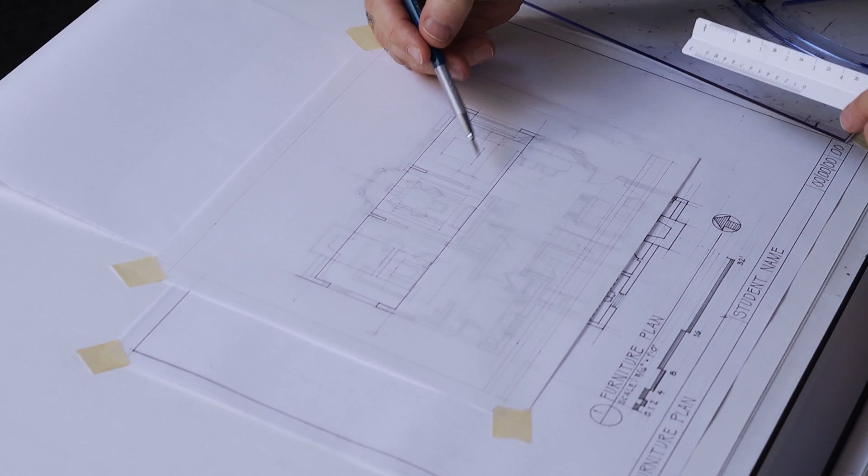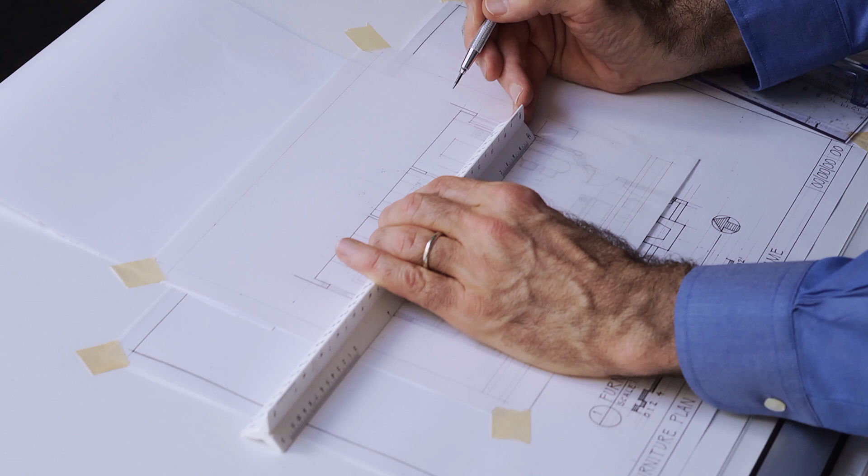So we're beginning to block in what we have in the elevation of the kitchen. You can always look at your kitchen handouts for sizes and heights, cabinetry. We've got our backsplash space, and we'll have the height of the cabinets. We know that they project out about a foot or so, foot 1, foot 2, something like that.

And then we know we want to have a little bit of a surround around the kitchen window, so I'll stop short by about 6 inches there, give it some frame, and there's a kick space.

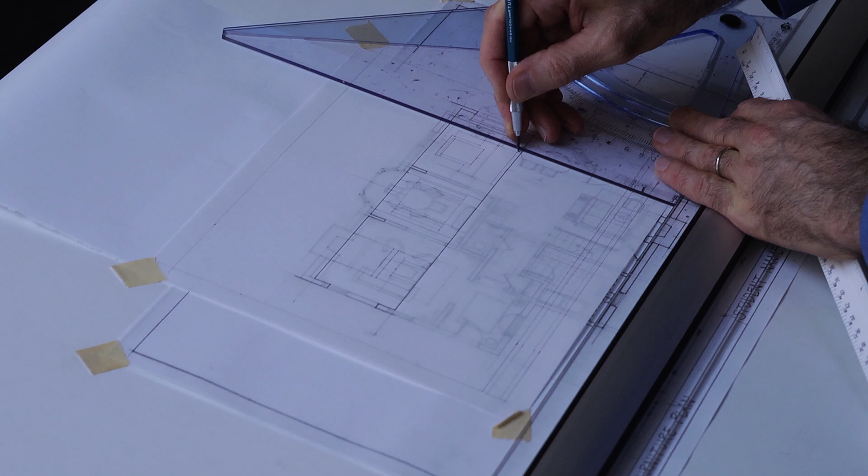Now when you're looking at the side, you can see a little bit heavier line because this is the side elevation that jumps out at you further, so bring that weight up just a bit, a little heavier, and then it gets lighter down there.

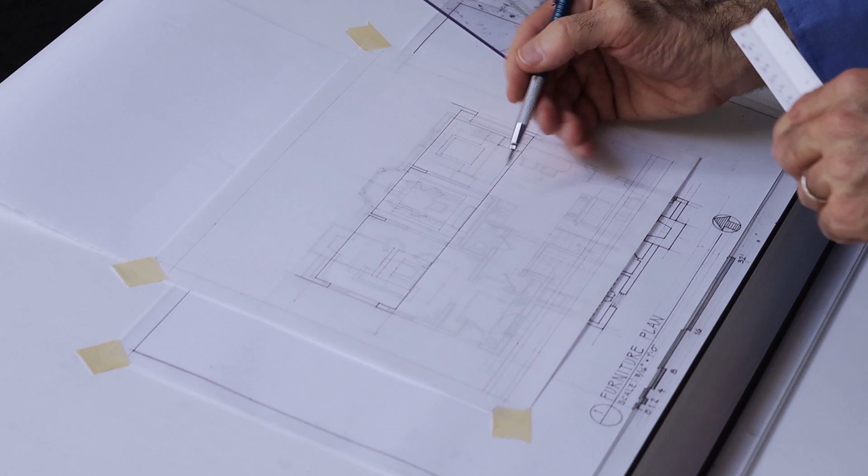And then up here is the refrigerator that you'll see standing up. Maybe there's a refrigerator panel over here, and that might go up to 6 feet, 6 feet 8, something like that. Panel height could be built in, so it could be higher.

I'll just give it some width and a little bit of projection for the face. Maybe shade it down to see what we've done.

We've got base cabinets, and we'll begin to show the divisions. We've got the refrigerator, we've got the upper cabinets, we've got the upper cabinets across the soffit above here.

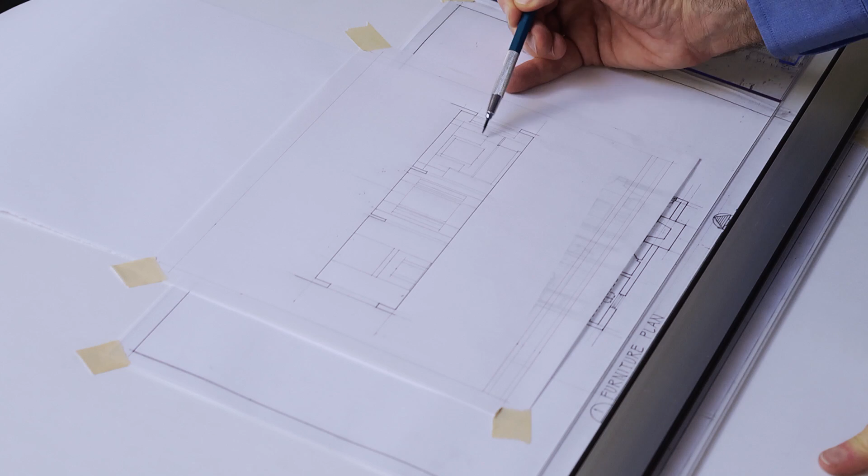We're going to have to show the hood for the range, and if you want to indicate the range there as a gas range, you could then, right above here, pick a height just to show that there's some burners up there, and that'll give you the sense of the range in elevation.

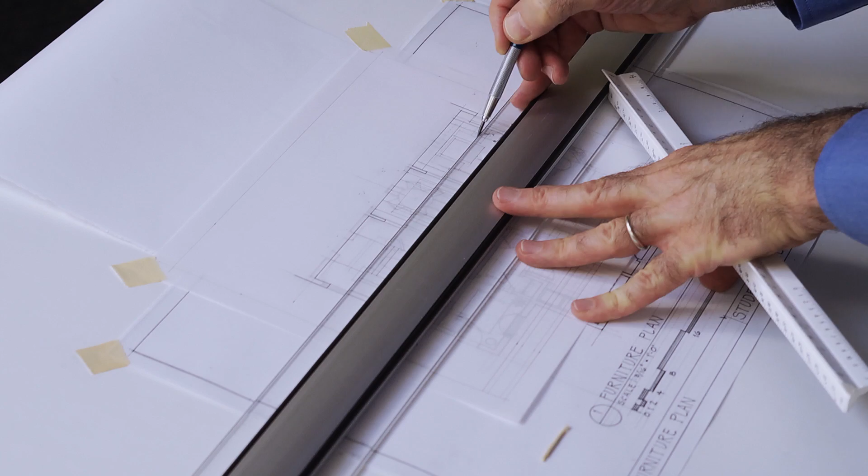So that'll project out. You see a little bit of line that projects out from the line of the cabinetry. You can see its little edge, and then it's going to have its angle going back. Maybe it's 45, maybe it's whatever. That's a design decision, but you can just etch it in the elevation here.

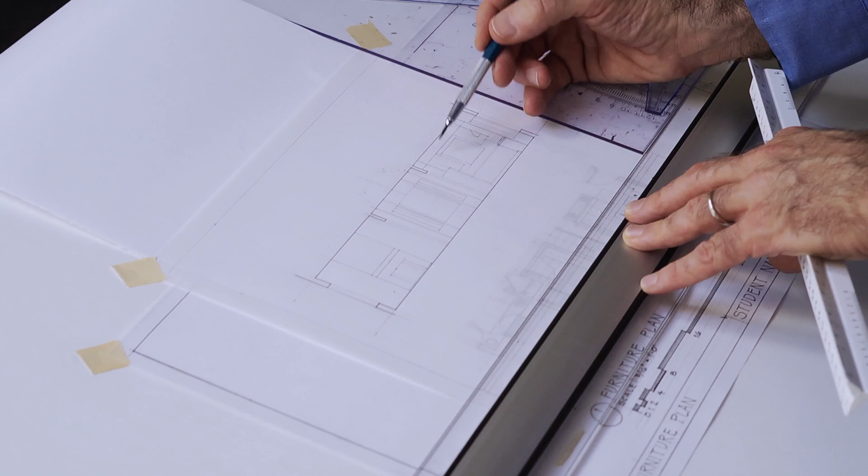And we look back at what we have: kitchen, range, hood. This will be the sink. There'll be cabinets here, refrigerator, upper cabinets, range. We've got the frame, so we could begin to flesh that out a little bit.

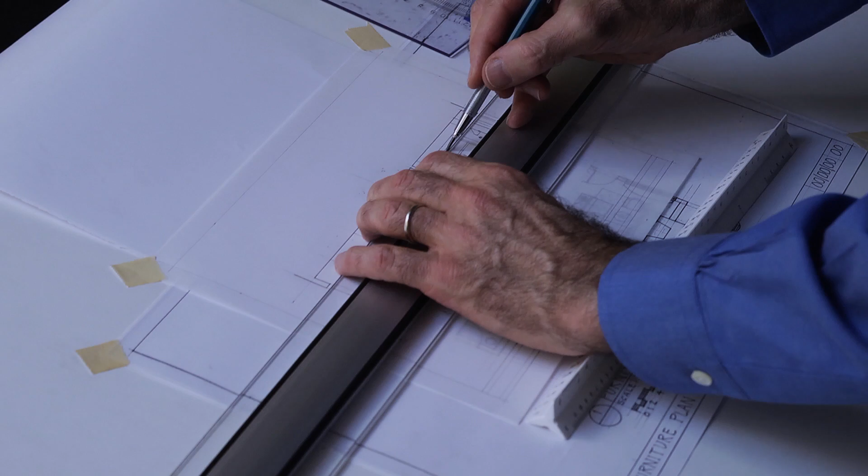We know that it's a double hung window. So we'll draw the frame of the window, the lower sash, the upper sash, the meeting rail that meets in the middle. And you see in this, you're seeing how the sashes of the windows work.

We even show that you've got like a little sash button, but you've got the lower sash in front of the upper sash. So that's why you see the frame in the lower sash complete and the upper sash is behind that. So that sets it in place.

We're now looking at the divisions of the cabinetry, and it can be almost on 24 inch cabinet centers like that. Our sink is in the middle, so we look at how the sink works.

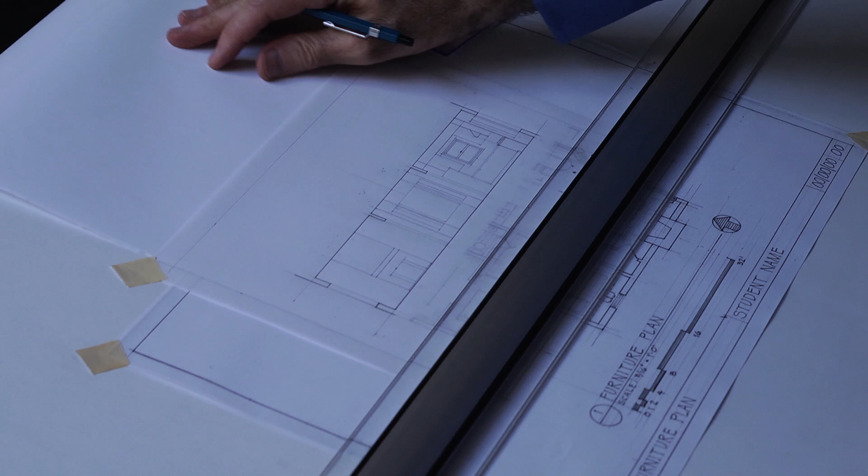If you wanted to indicate in the elevation where the sink is, you can always kind of dash that in. So behind there is the sink, and the sinks are usually like about 8 or 9 inches deep.

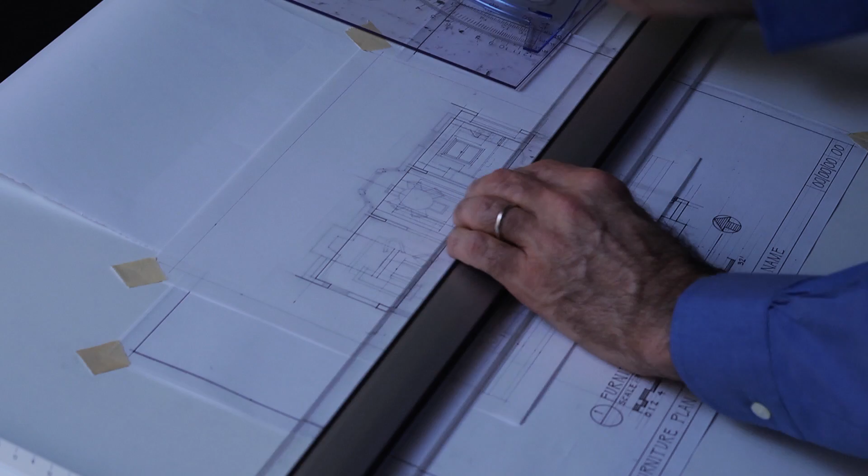You'll see the faucet in the elevation. So a little bit of a line for just the way the faucet works. And then maybe that little extra for how the handle's going.

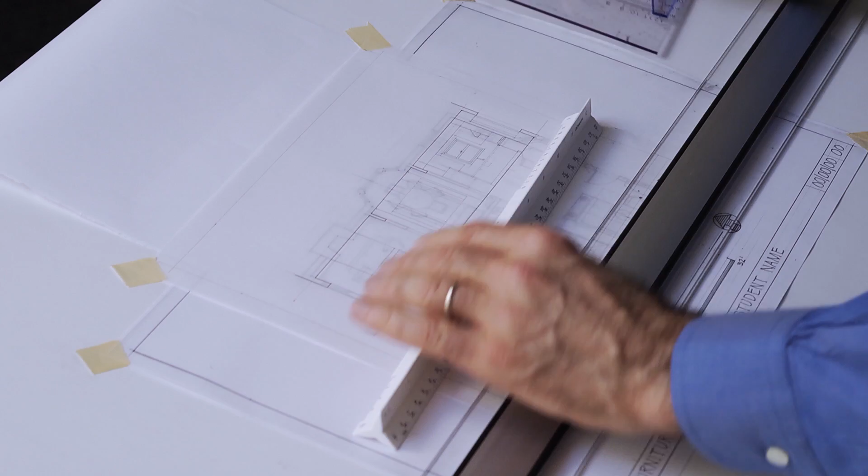And then we've got our cabinetry here, and you can divide that up any way — 2-foot panels.

They only go down to the kick space. You've got to have a 4-inch high kick space there. So maybe the way we divide that up is we've got the doors for the little panels here, in the corner. They come out at the corners.

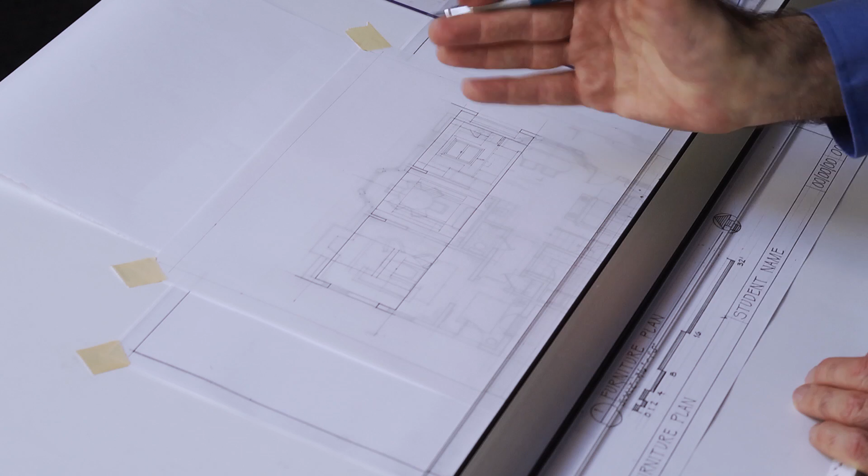Maybe we have that 2-foot panel split in the middle for the sink. So the sink has its own cabinet. And then on either side of that is the series of drawers, the essential drawers that you always need.

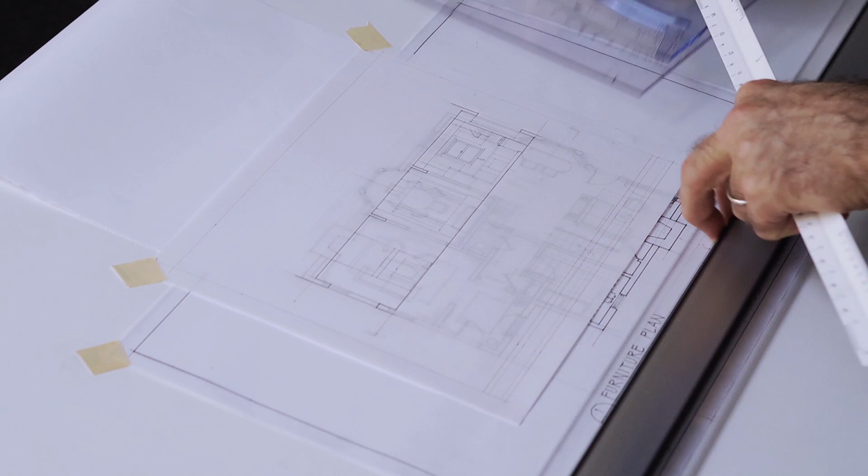And then you divide that cabinetry up into doors and cabinets. So you have some apron here, and then the doors that'll open for the corner. So now you have that lower cabinets.

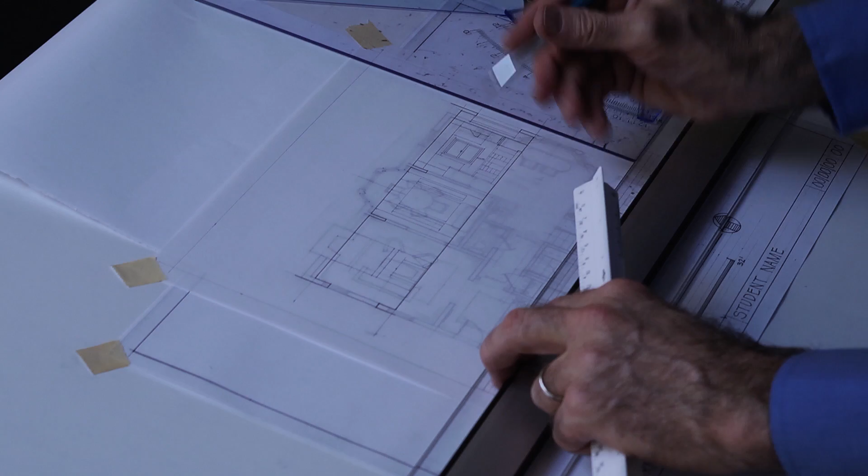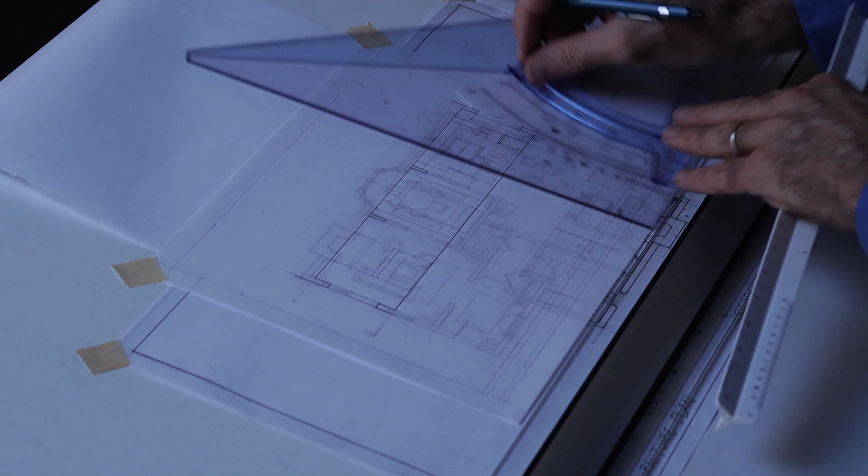Since it's small enough scale, I wouldn't bother with all the dashed lines to indicate how it's operating, but you can put hardware lines in there that can kind of give it some indication about how they're being used. Even though they may have finger pulls, you can begin to get something about how this is working.

So that'll tell you something about the cabinetry operation. And then at a glance, you pretty much get a sense of the kitchen cabinets down below there. And the same thing for up above — you just heavy up the lines a little bit so you know what's in what plane.

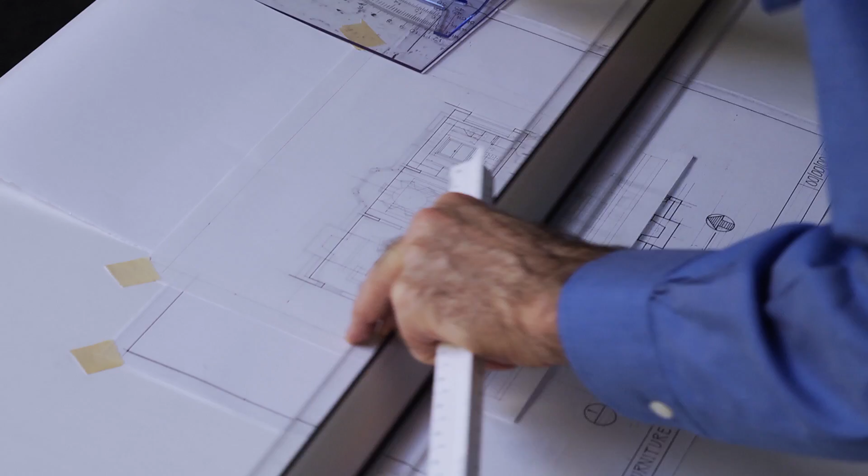And heavy up, we have the lines popping out.

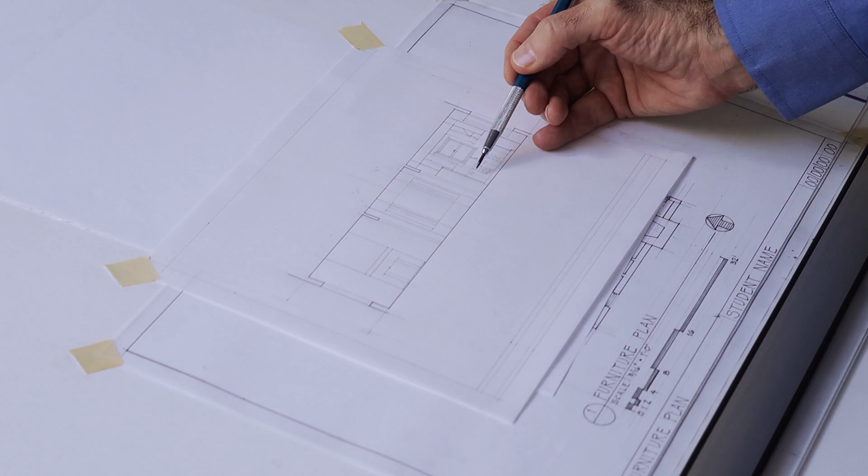I'll give you a sense of the kitchen, where you've got your countertop coming out - that's for the range because it's there. You've got your sink over here underneath the window, with doors that open at cabinets underneath the sink - you can see the sink dotted in here. You've got rows of drawers for your little tools, and little cabinets down below that open out. You can see how they pull out without having to have the dashed lines, which might make the drawing too complex at this scale, but you have the pulls to let you know that's how they operate.

Backsplash window - you can see that's a double hung window, and there's a hood for the range above. You can see the wall cabinets that go up to the soffit here, and that this soffit is in front of this.

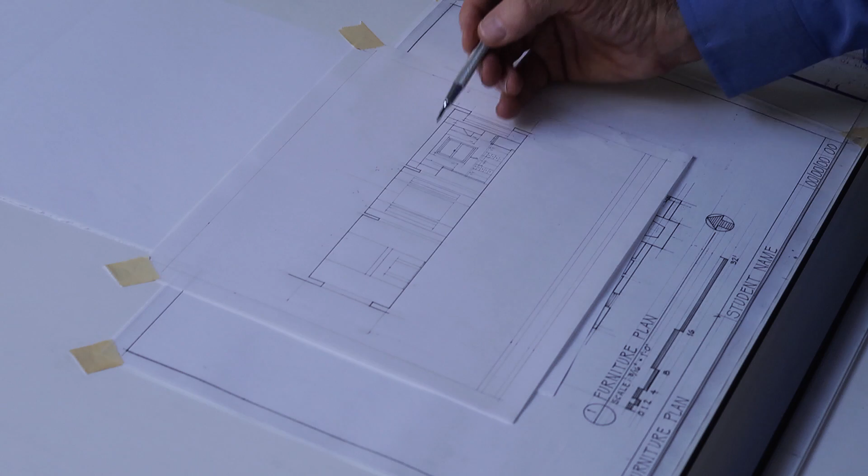We could probably erase this line right here and this line right here now, because they are soffits that you'll see in the side - you don't need to draw them. So use your erasing shield, you can get that line out, and it'll make the drawing a little bit more clear. So that helps in the kitchen.

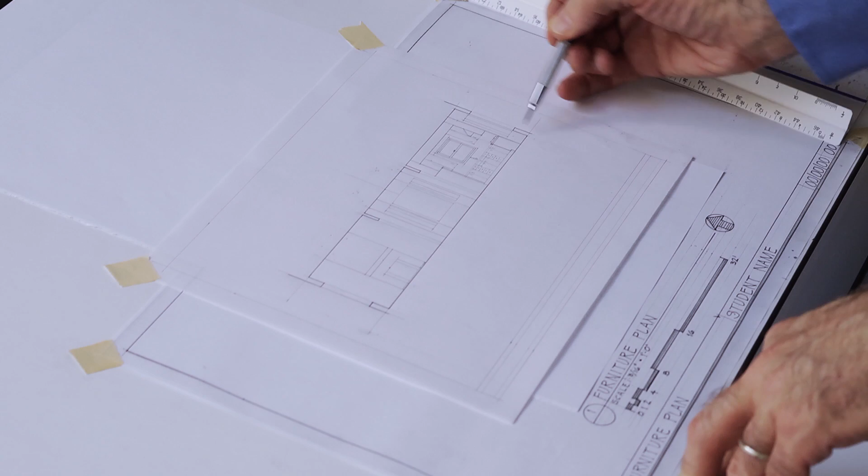Now we can go back and do the breakfast area, to get the banquette we've drawn in here by this window, and then we'll put the windows in the section too. But we're going to go look at the windows for the dining area here, now that we have most of the equipment and furnishings for the kitchen.

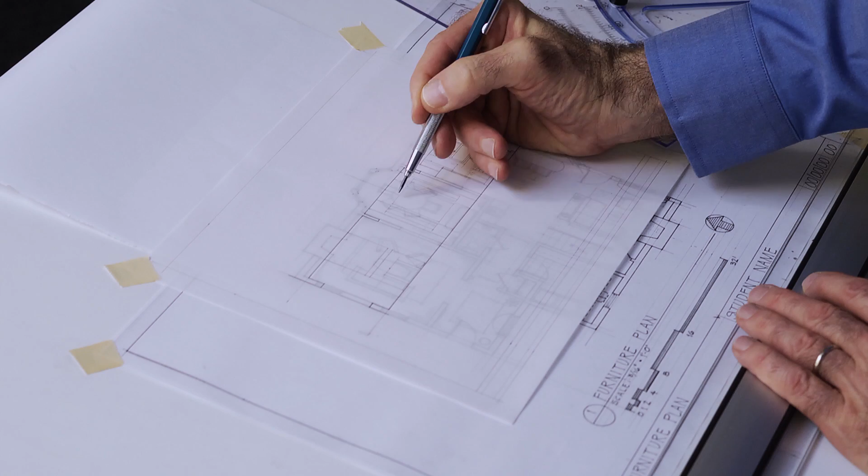Go back into the dining room and do the same - we'll get the window and the window. Now the straight window is pretty easy, pretty much like what we did here. We're going to have to get that mullion in here because there's a little mullion - it's two windows right here, so we'll get that and draw them up. But the challenge will be drawing the little diagonal, the skewed window there.

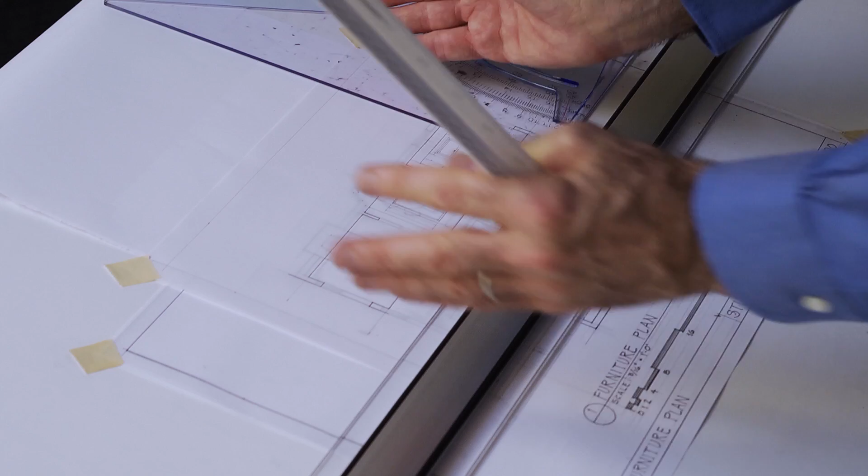Now we'll do the frame around the window. Then we've got to get the midway point, since we'll figure they're double hung windows - they could be casement windows, and if they were, maybe we'd draw them with casements popping out. But let's say we've put all these in as double hungs - you can choose to use casements in your plan.

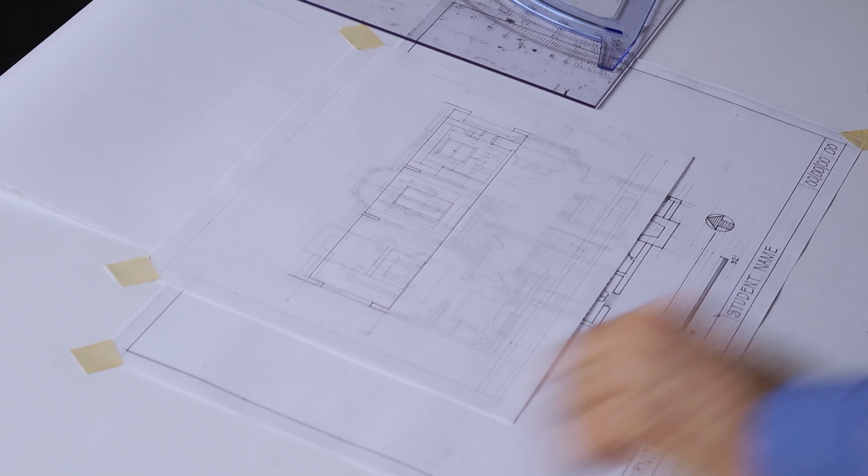But if it's double hung, we'll find the meeting rail, which is midway - the meeting rail overlaps, and then we have our 2-inch sash frames all around. So now that we have that, boom, lay that in. You can just indicate a little line for a sash lock, and it'll give you the sense of that window operating up and down as a double hung window.

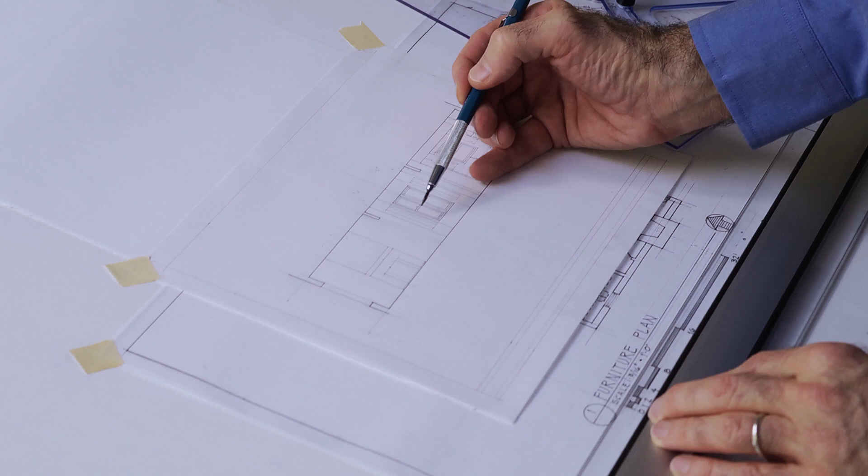Now the thing is to translate that into the angled wall. I'm getting some fine lines - I know this window is no longer flat. Here we're looking at it straight on, perpendicular, but here we're looking at it on the angle. So we'll just pick up these same sash points, but they start a little bit further back. Here's the wall, dies into here. Here's the wall, dies into there.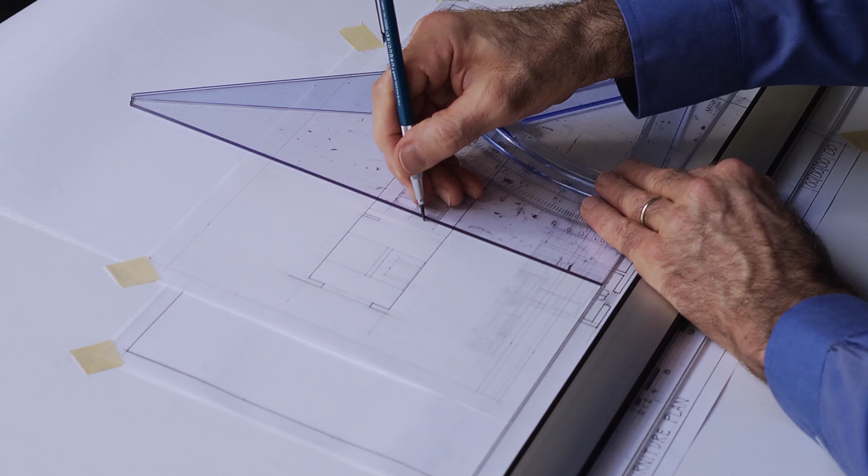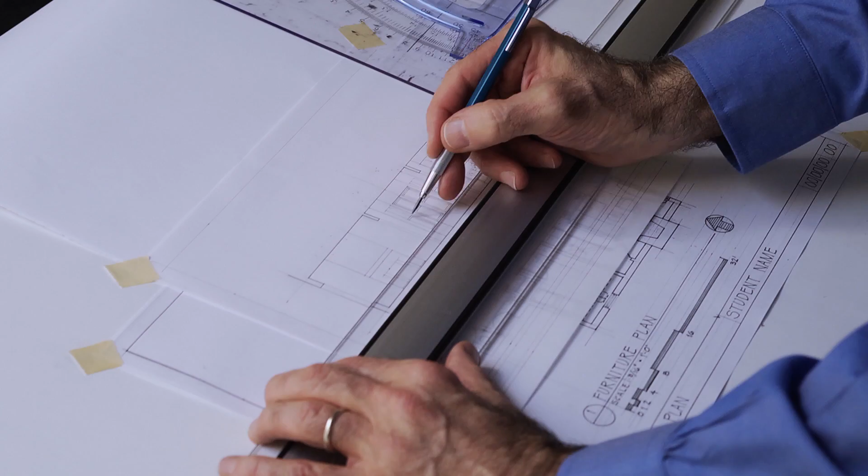So that becomes the frame of the front - frame of the front - and it has its thickness here, it has its thickness there, and then it dies back at the angle. The back part of it you won't see because it's hidden by this part of the wall. Whereas here you see the side jamb - here you're going to see one side of the jamb, you're not going to see the other side. So you have that frame and the thickness of that frame, and then the upper sash is set back just a tad behind the lower sash.

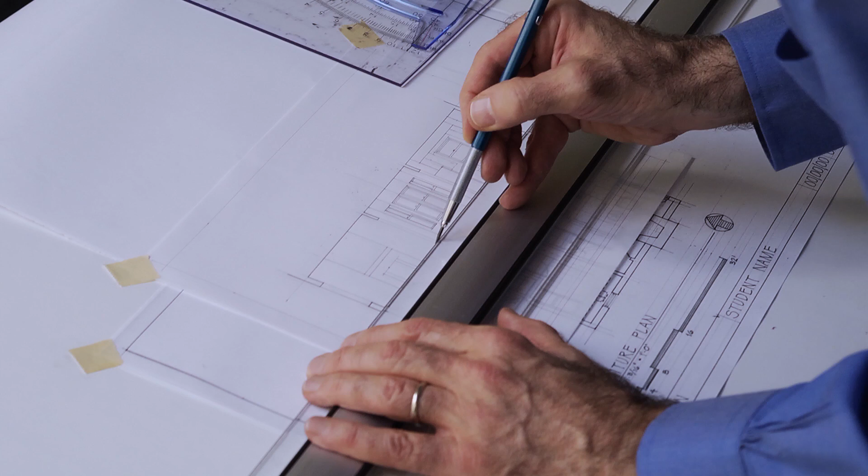Now we've got basically the elevation of the dining room interior, the bay window. The thing we're going to have is obviously a base molding - you'll see some of that molding around here. We can carry that right across, and that can carry across into the room as well.

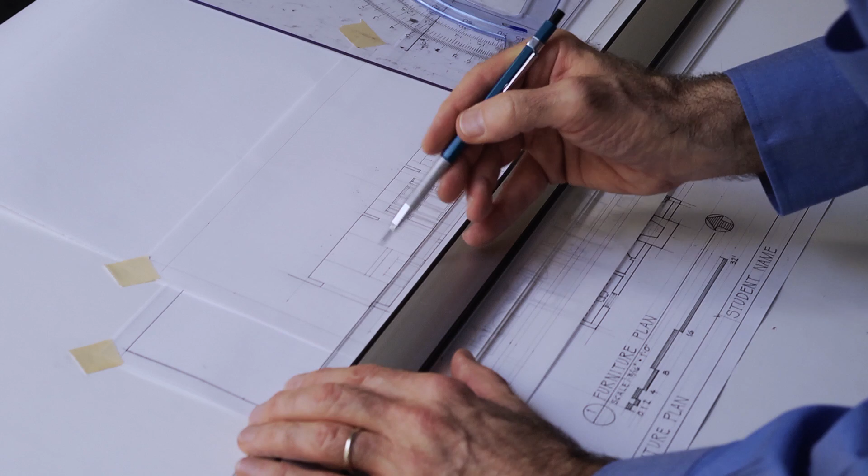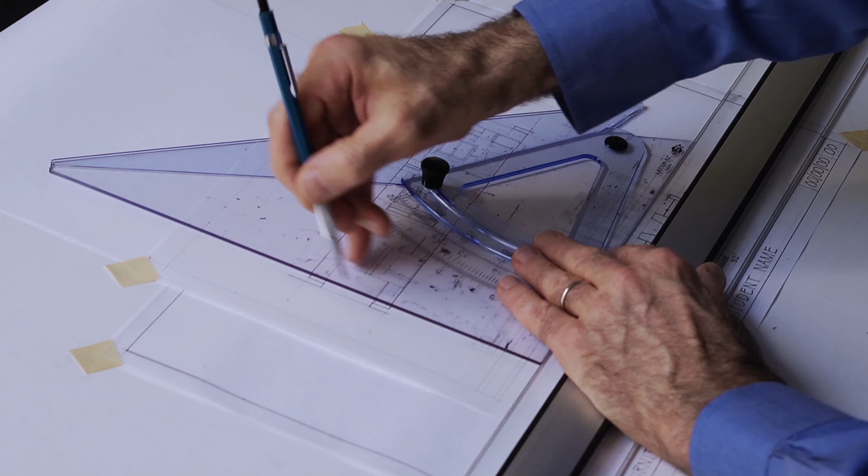And now we're going to set up this - these are the bookcases that we'll be seeing. So we'll look into the bookcase. We've got the fireplace wall, and we'll make those bookcases have a line of cabinetry down below, which is pretty much about the sill height of the window. So we'll get that in there, and we'll have cabinets up above, like wall, almost like a soffit for the top, right about where the head would be. So we've got a little bit of frame all the way around the fireplace here.

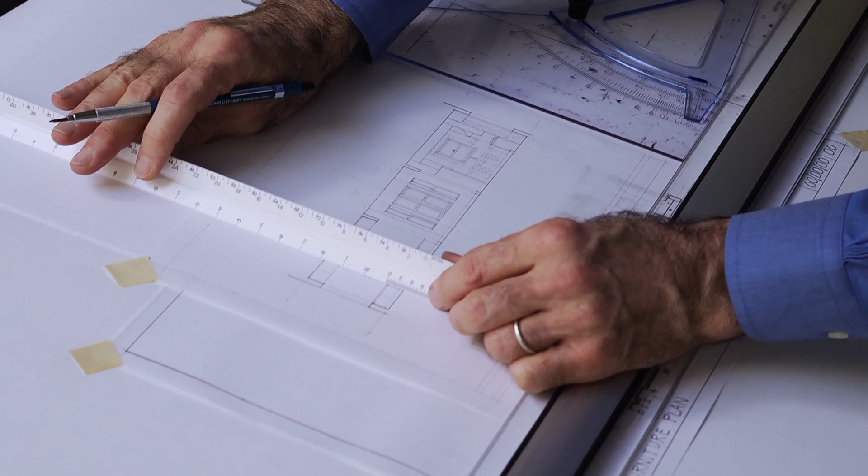I'd like to show some thickness, so they're usually like about 3/4 or an inch, and I'm pretty tight to here, so maybe I'll sharpen that point to get that finer line.

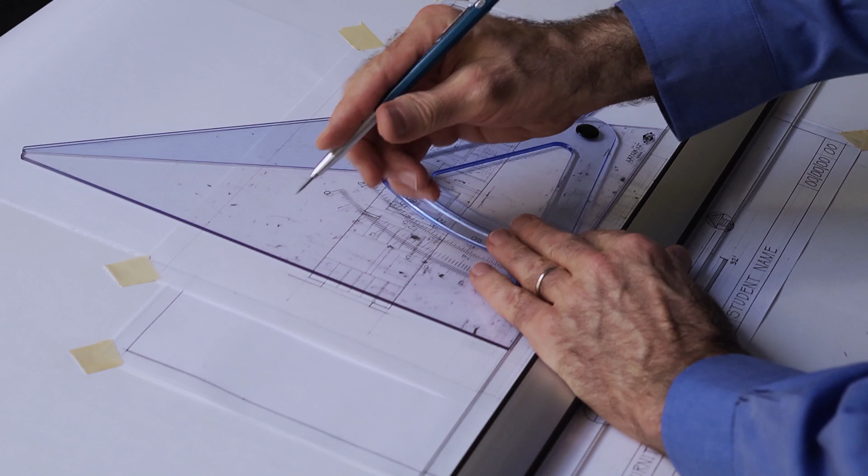I just draw the line around, so I got that little framework. As a matter of fact, we might want these cabinet doors up and below to have a raised panel configuration. You can just draw that panel configuration in there.

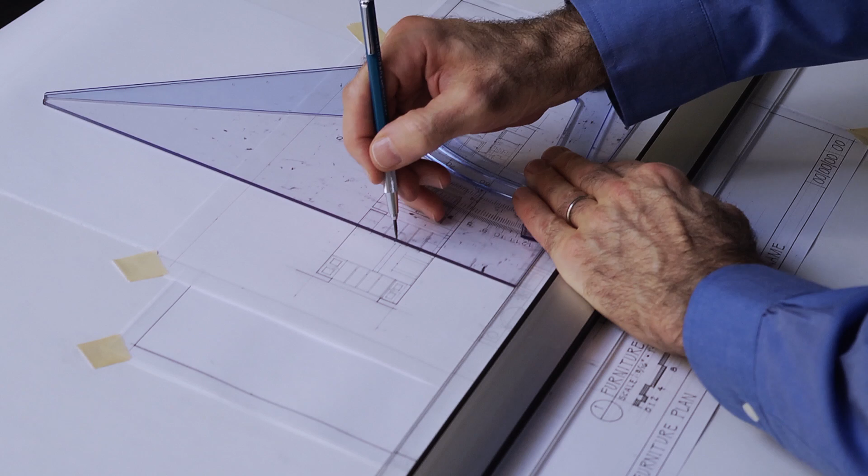Okay, so now we're just framing out. You're going to build up some of the textures, details of your elevation. Ceiling molding there, but what we'll do in here is we'll try to find a mirror that we can put over the mantel that might fit in the space.

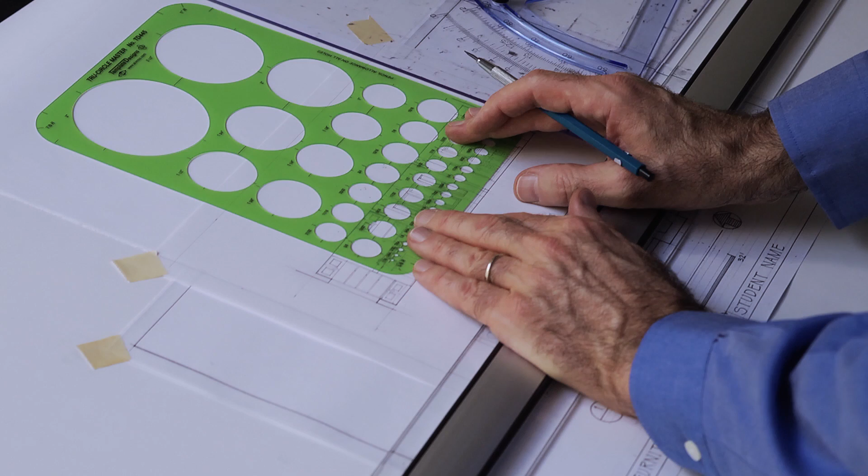Thinking about size, what space you have left, you might find some design, another artwork or something like that. Try to get it to be centered. You might have to measure that. Remember, our measuring technique was find the center

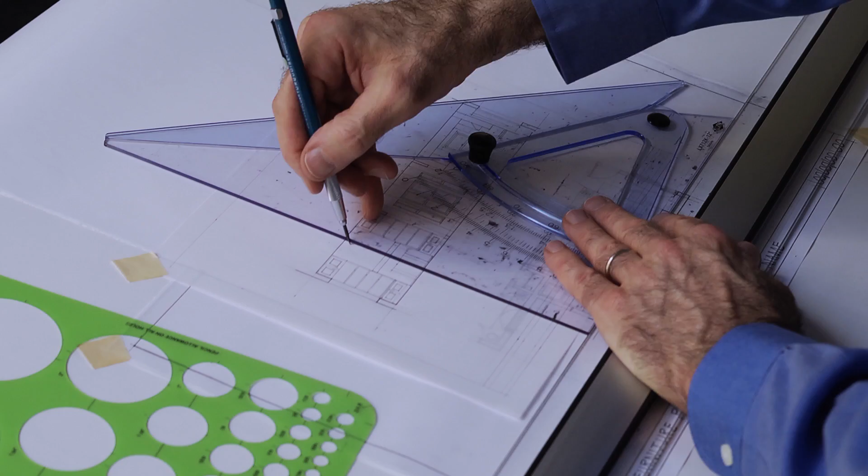of the area, if you want to do a quick graphic of that. Just connect the diagonals. Then you have the center, and then you can line up your axes.

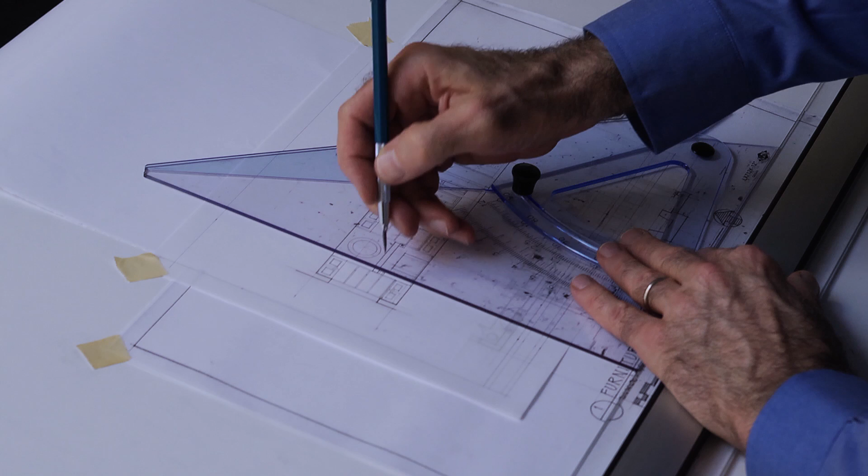So now you have the great room. I'll show the little wall that's in elevation here, and then the upper part of the wall that's in section, fireplace.

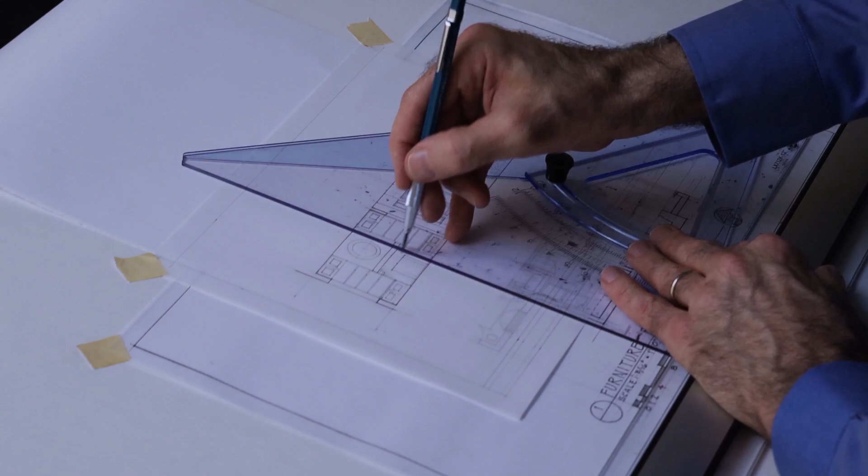If you want to show a little bit of texture, like maybe you have some stone in the surround, you can show with texture lines a little bit of tile or mosaic or whatever that may be, just to give it that touch in there. You don't have to do the whole thing, but you can do some beginning parts, the grid of your tile, whatever your treatment would be. You give it, just like we did with the flooring pattern, a little bit of an idea, and then a few indications. Let it fade out, and then you're describing a little bit of the texture without going everywhere.

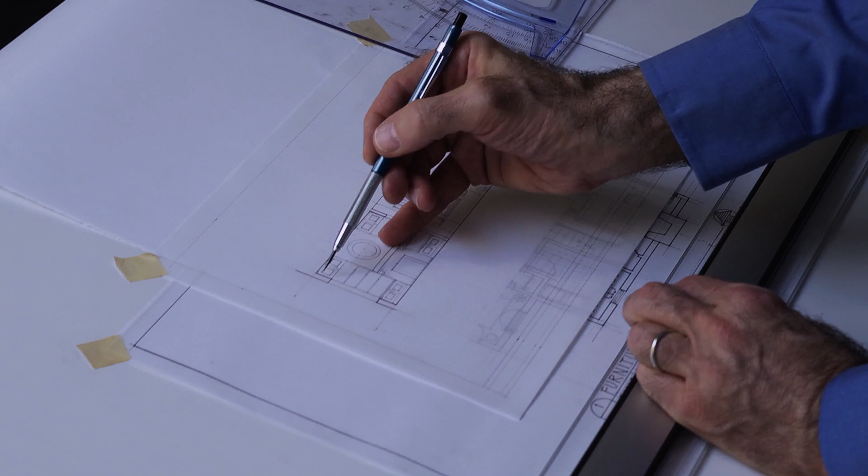So you've got the great room, fireplace, cabinets. Would have had a little ceiling molding in there. We're going to bring that down, but that still works as the idea. We can actually show some ceiling molding in here. It's small scale, but let's say there were ceiling molding in here. You'd see it through here, and you'd see the framework

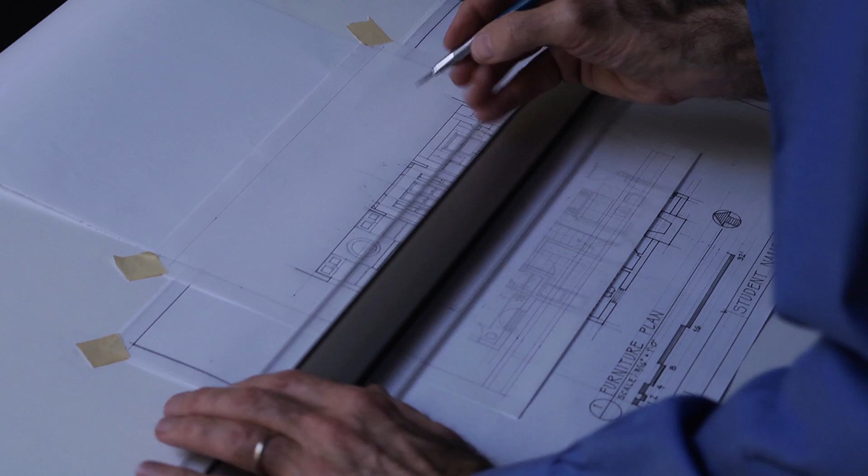in section as you're cutting through. That might be the line of the ceiling molding, and then you'd see a couple lines as it goes across, and you'd see that line really follow the line of the trim wherever it breaks back. And even in here it's a little bit less because it's on the angle, but it's still following the framework. So it goes in, and that would be the line of ceiling molding in the dining area.

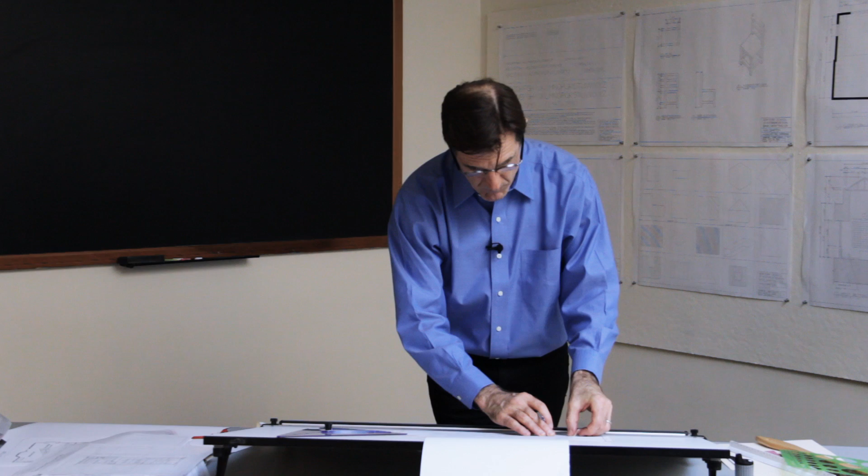And then back to the kitchen. And the last thing we want to get in the kitchen would be this banquette where we're sitting. So we might get another profile of the banquette right here at the window.

If you want to draw that window in, it's just like drawing it in plan, more or less, but in section. The other thing is we have this other bit of window to draw in the canted elevation at the bay over here. We can take those lines right from our section window, however, so we'll draw the section in, and you'll see how that works.

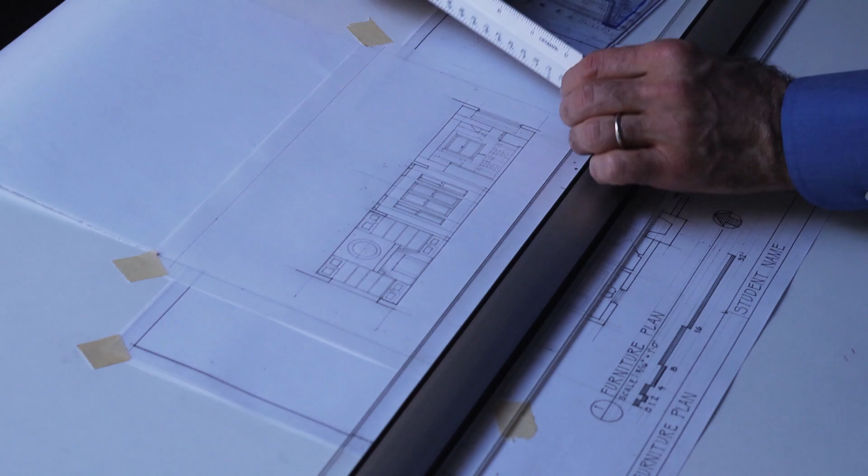So you've got the head, the sill, very small scale. It's hard to show the operation of a double hung in section, but normally we'll just show some meeting rail right here at the middle, 6 foot, so at 3 foot you have a meeting rail for both sides. This kind of detail is something you would normally see at greater than 1/4 inch, 3/8 or half or something like that. But it'll give you the sense of how this is really working as a double hung,

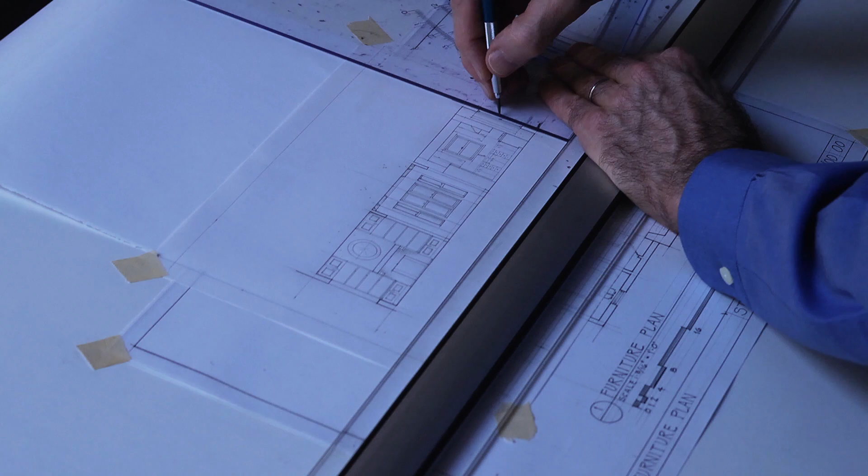where the window down below is in front of the window up above, the upper sash to the exterior, and the lower sash is to the interior. Lower sash, upper sash, lower sash, upper sash, lower sash in front, upper sash behind.

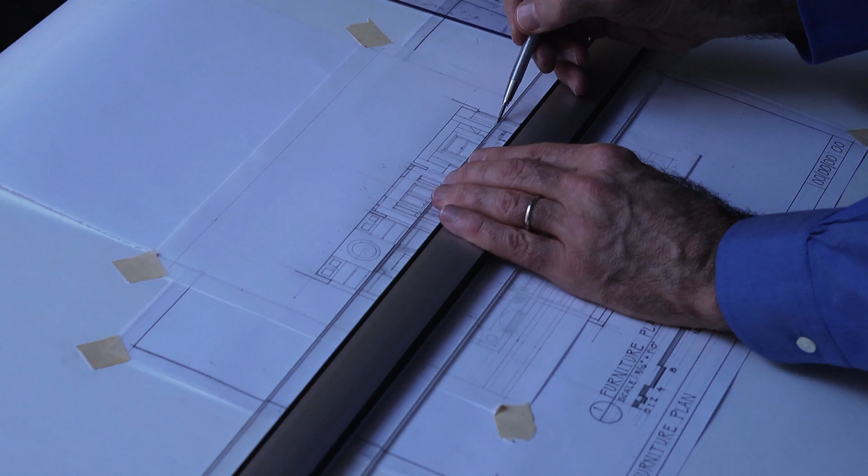Now we're going to draw that in this bay window here in the same way. Pick up the meeting rail. Goes here. And it follows down right here because it's at an angle.

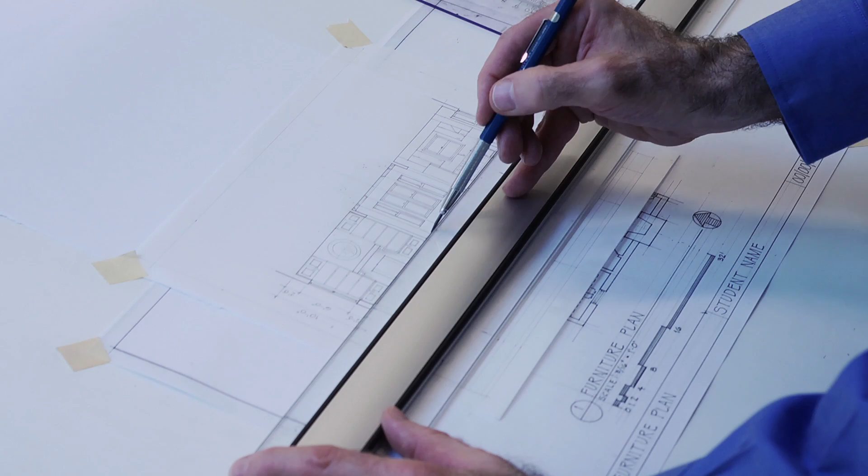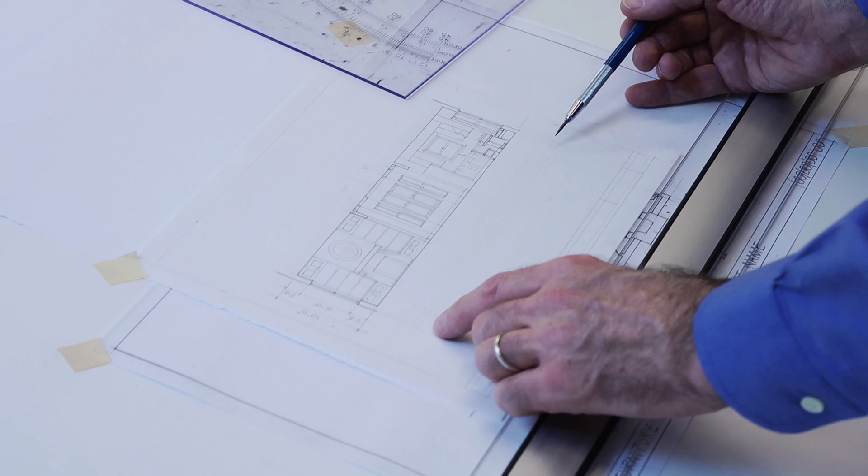Dining area, framed opening into the kitchen. We've got our seating area shown in here. We have room for our name and our scale, our graphic scale.

No north arrow, obviously it's a section elevation, section showing the elevation with our little furniture in it, and you can add more furniture. You just have to decide where you obscure. It's okay to obscure to show things that are in front.

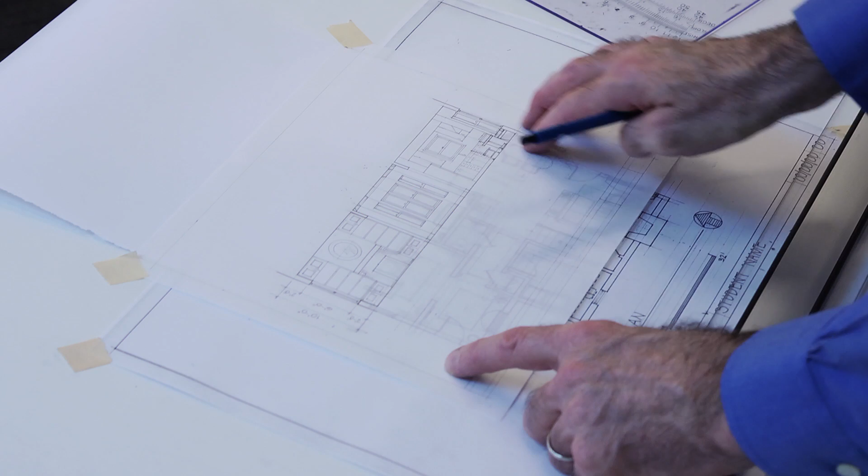In our case, we're cutting right through this seating area. We want to see how the seating area relates to this bay window, so we showed it all together: the bay window seat, the banquette, the table, the little chairs next to that, and how it lines up with the kitchen, the window, the cabinets, base cabinets.

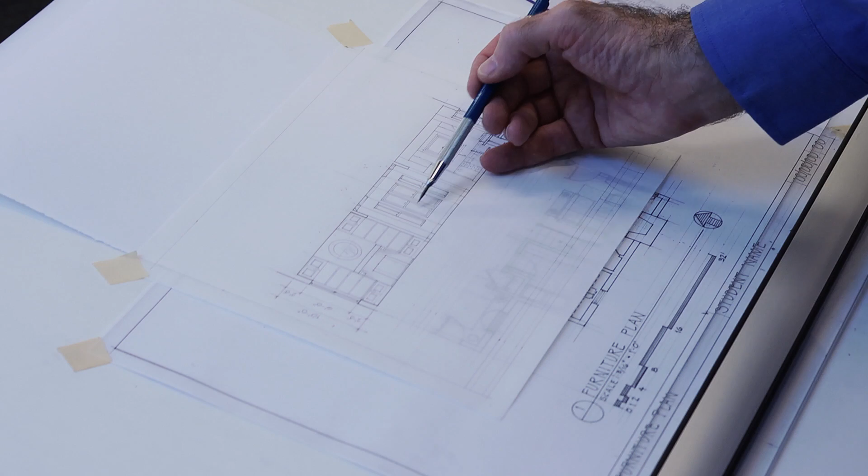We didn't do so much in laying that out at the dining room, but we have all the windows there, and you could do the same level of laying that in, but we want to show you how this thing is operating so you get a sense of the bay window for the dining room. And the same as we go for the living room, we get to see all the cabinetry laid in and the fireplace surround as well.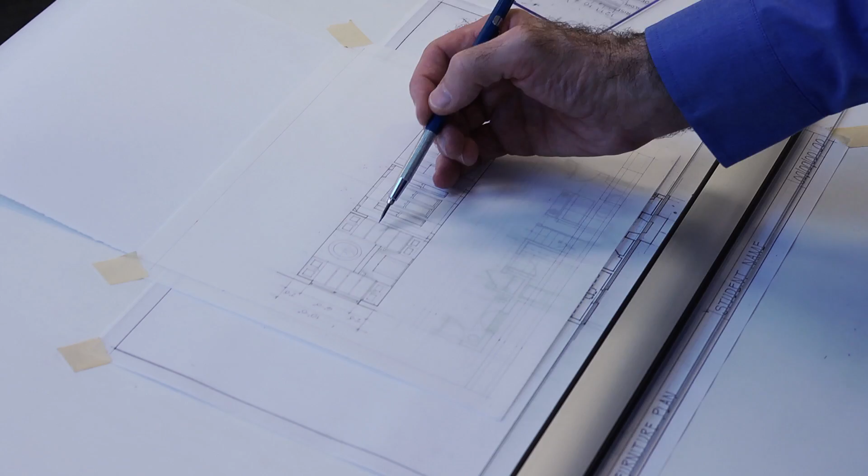You can add other bits of information as you wish. Fire screens, you know, you can put in books, bibelot in the cabinet to give it a sense of life.

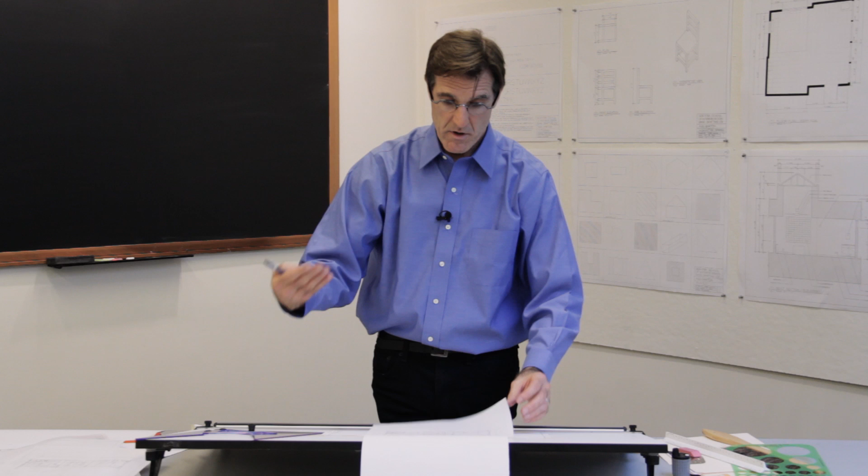But this is the basic structure to translate through the overlay method of the furniture plan into the section elevation showing the furniture and the equipment. So you can relate pretty immediately the plan view and the section view, or the elevation view. In this case, we'll call it the section elevation.

And we have that space right in here. We'll use our same bubble there. And just to get that to fit, to find the height of that, we'll just draw that in like that.

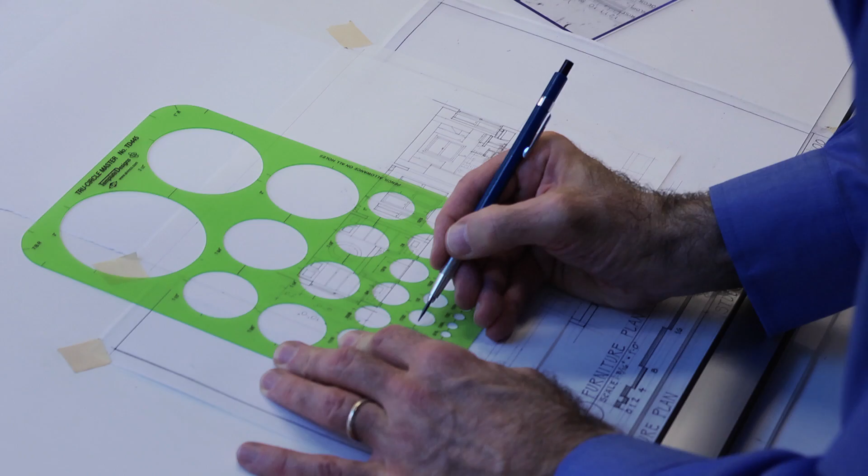We have it at the same scale. We call this the scale of 3/16. And because it's an elevation, a section elevation, we won't have a north arrow. We'll just have a graphic scale.

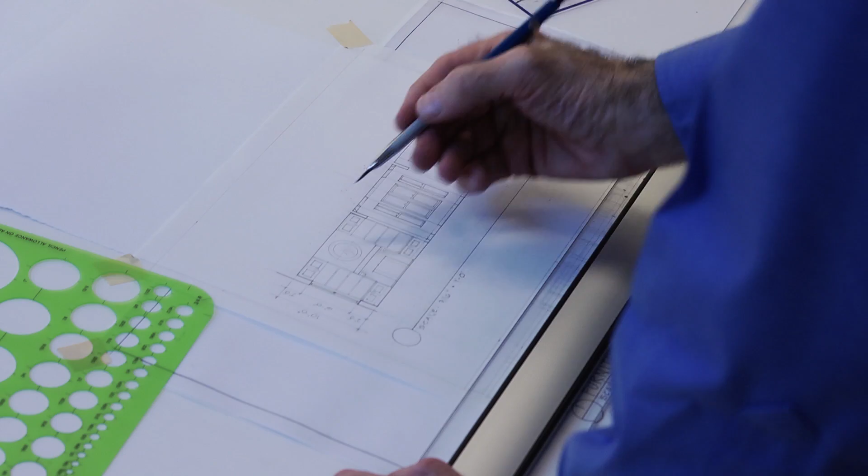And because it's a section as well as an elevation, we'll call it a section elevation. Sometimes it's referred to just as an elevation, including the section, but we cut the section and we drew the elevation, so we'll call it a section elevation. And we'll indicate that we're showing furniture, so it'll be a furniture section elevation, even though we excluded some furniture. You can always go through that same process.

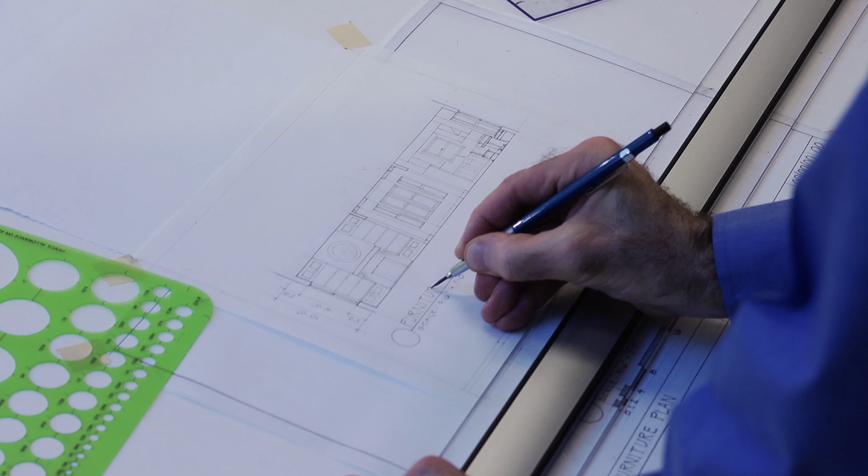Layering on information. So in here, where there was a lot of information of the cabinetry, we still brought out the furniture in front of it, so you get a sense of their relationship.

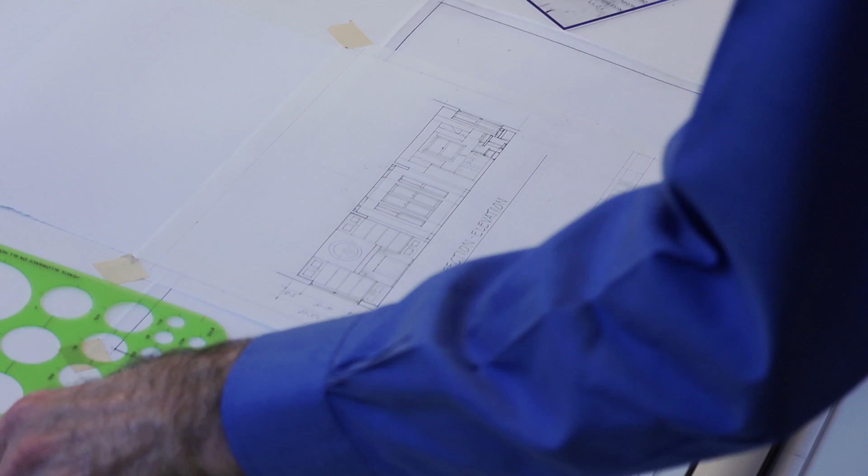This is drawing 1. It'll be the next sheet number, so the drawing is number 1 again, and the sheet number will be the one after our furniture plan. And if you want to just draw the graphic scale below it, we'll just add that graphic scale below it. So even though it's not a plan, we'll still refer to the graphic scale.

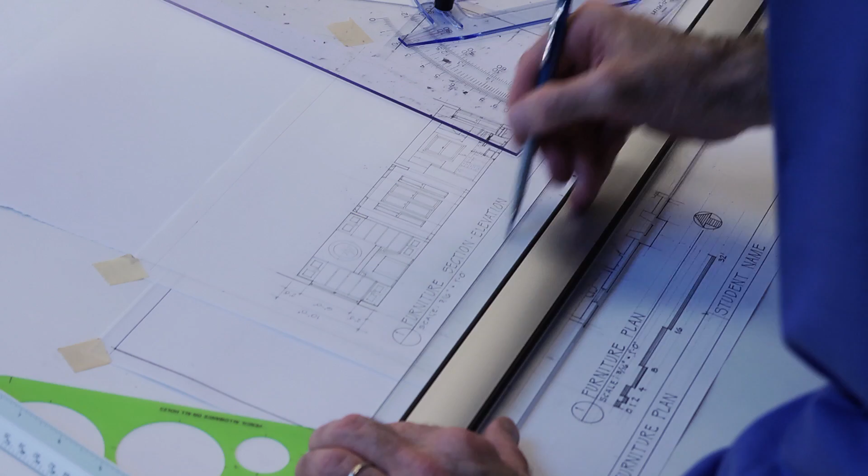It helps set the tone for when it's enlarged or reduced when you scan it in. So it'll be measured. So you just tack that over there.

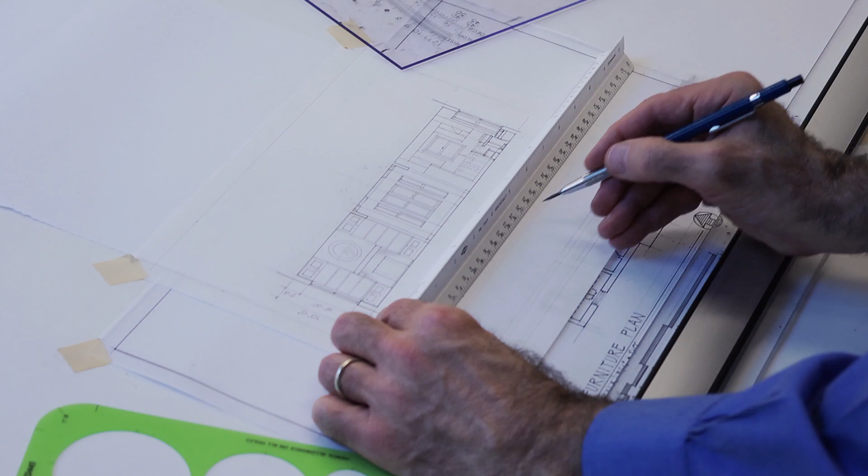We'll look at the dimensions again: 0, 1, 2, 4, 8, 16, 32. I think we'll just go to 16. It seems like that's sufficient.

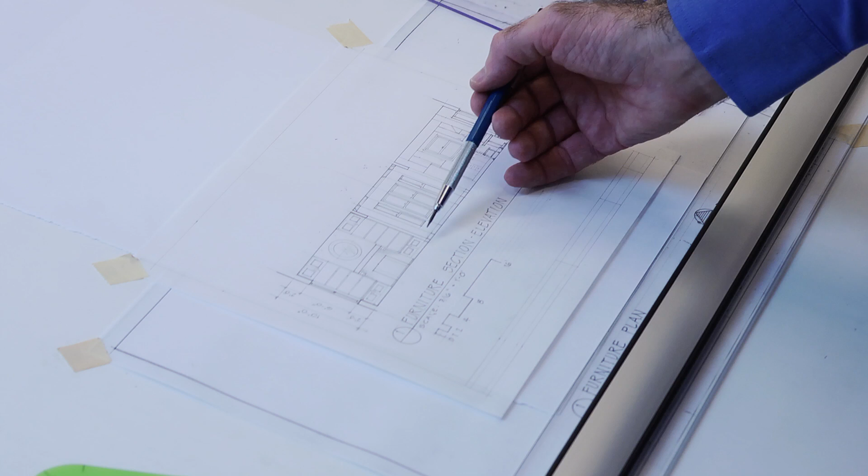16 feet. Now you got the sense of the drawing with its dimensions, the major elements, the overall, intermediate. If there are any other little things you want to call out, you can call them out on the sheet, such as 6 inches or 4 inches for your molding, other pertinent information, but this is enough.

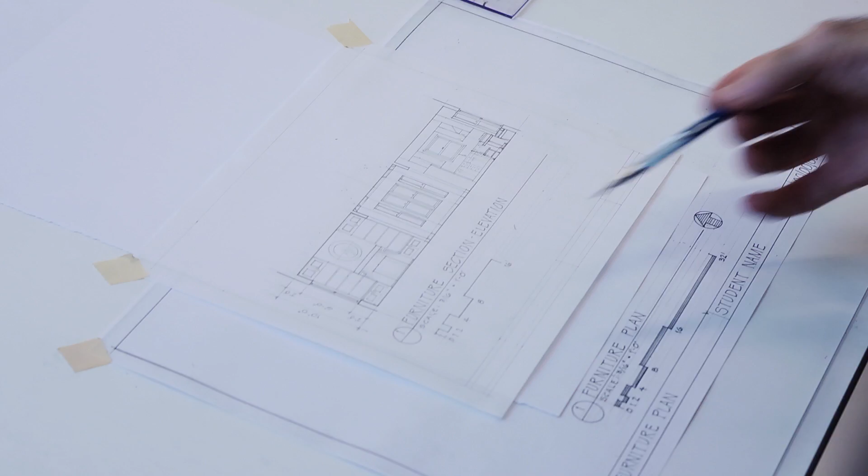And then you're all set. You just heavy up your lines for whatever needs to pop out once you start getting all of your line weights in from your furniture. Then you make sure that your section weight line still reads, still pops out from all the other line work. And there you have your furniture section elevation as an overlay construction based on the furniture plan.